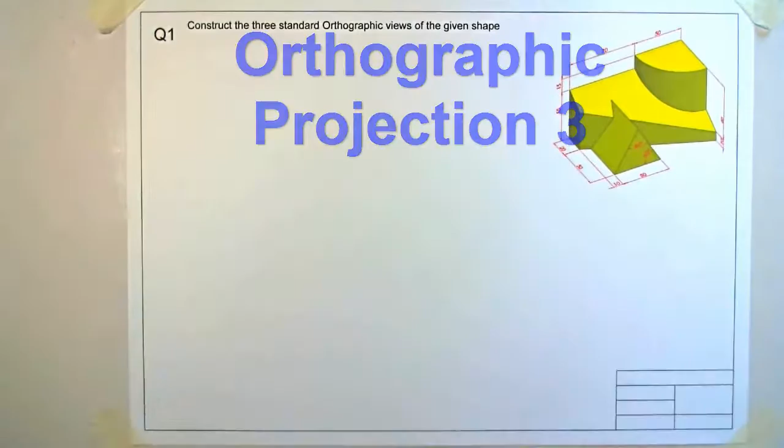So with this drawing it's a bit different because it has both curved and sloping surfaces. But again, we start with our XY line.

We'll start off with our front elevation from this view. Draw in a box that can contain the shape.

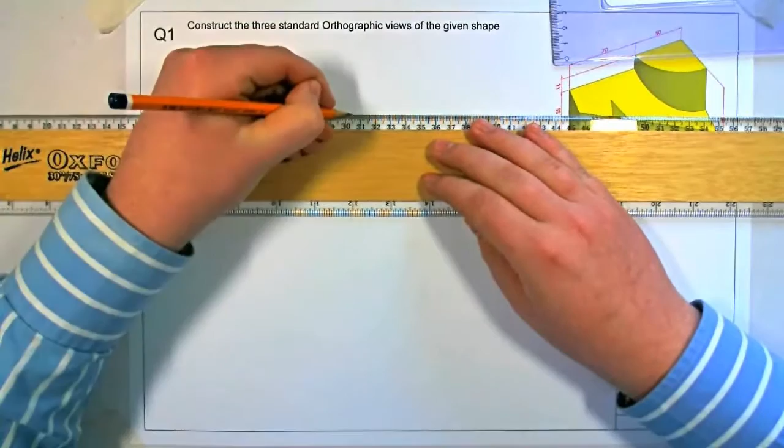Then measure the height and project this across. In this, it will not be possible to draw everything in one view.

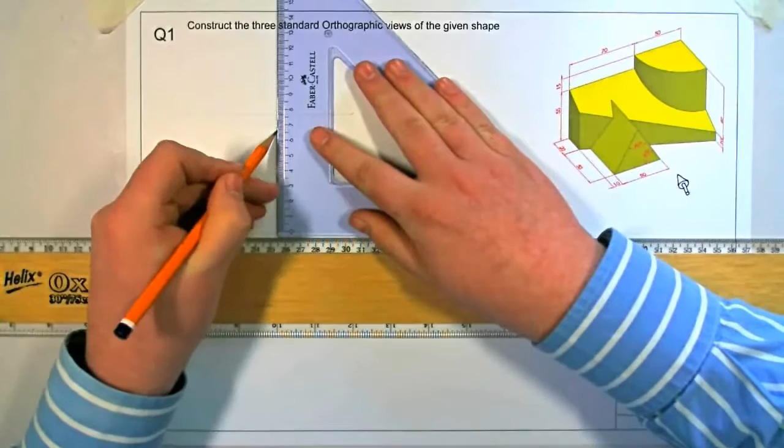For the triangular prism, 60 degrees, so draw up our line 60 degrees and the other on the other side.

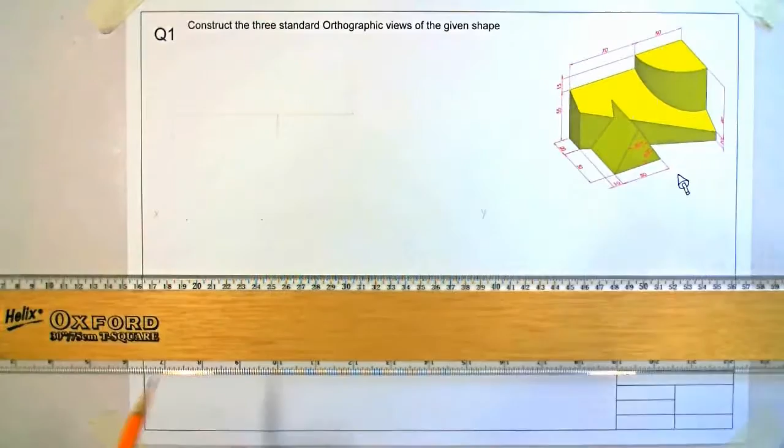Mark in every piece of detail that we can see. So with our ink, this is all that we can draw with the amount of detail that's been given.

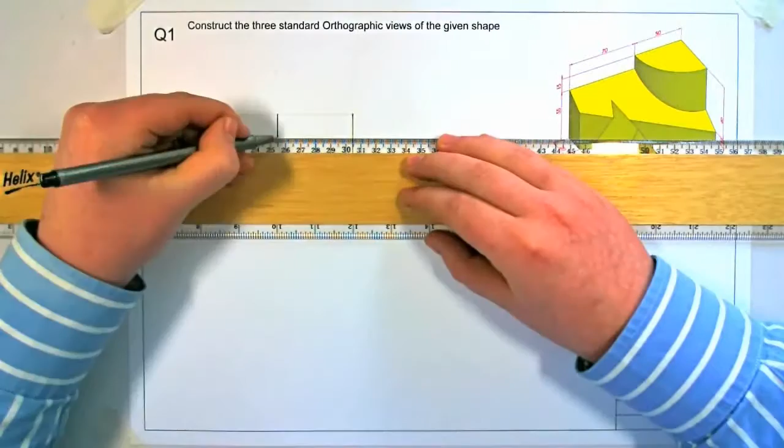We now need to look to our end elevation. So if we draw our end elevation, looking in this view, we should be able to locate some more points.

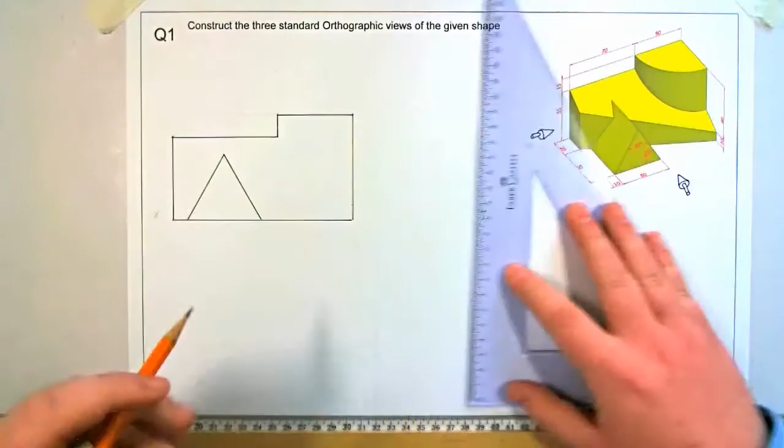Mark in our YY line and label it. Then begin to draw in what we can see in the end elevation. Project across our points that we need.

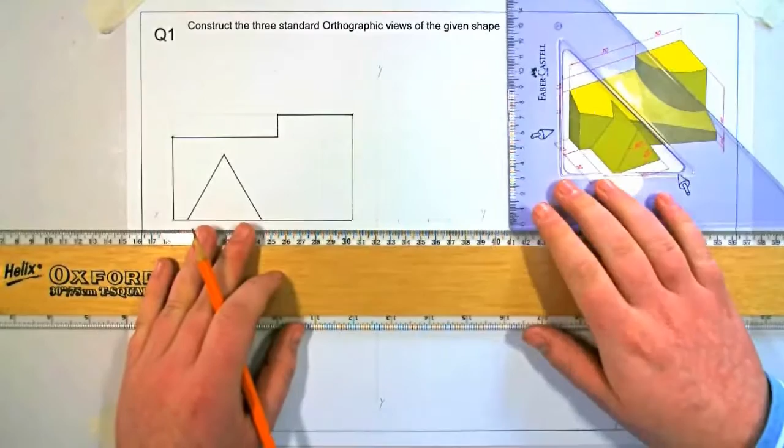Ensure to think carefully and mark in the lines correctly.

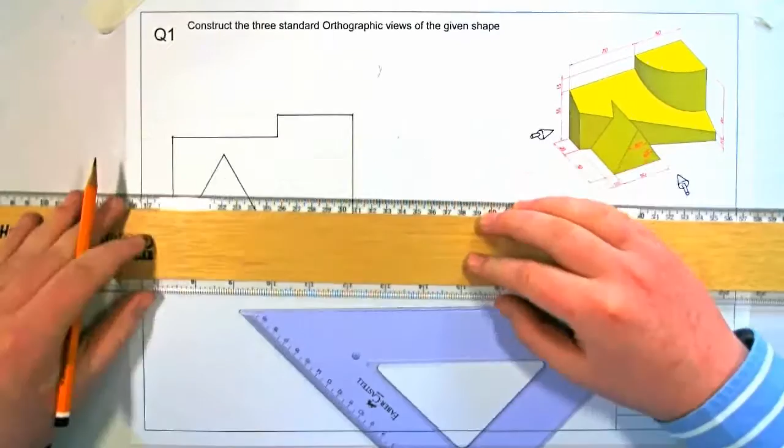So with this detail located, we can project it back to our front elevation.

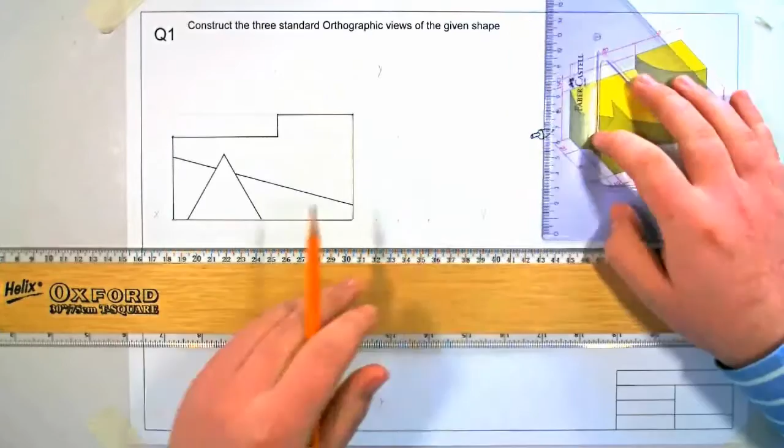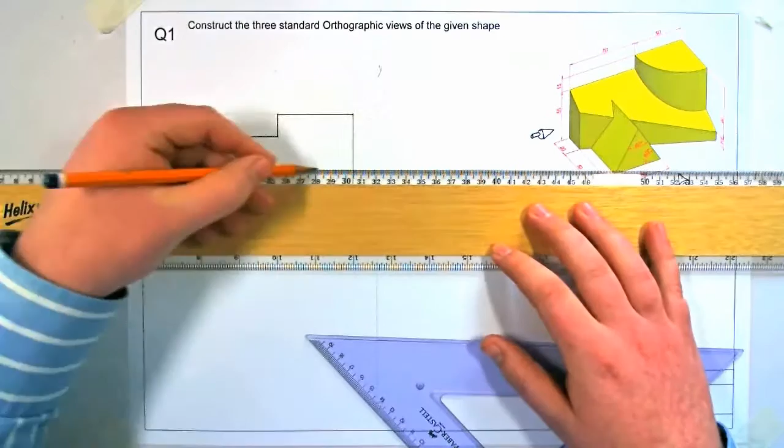Project across any point that cuts. We cannot draw all of it in the end elevation, so we need to look to the plan as well.

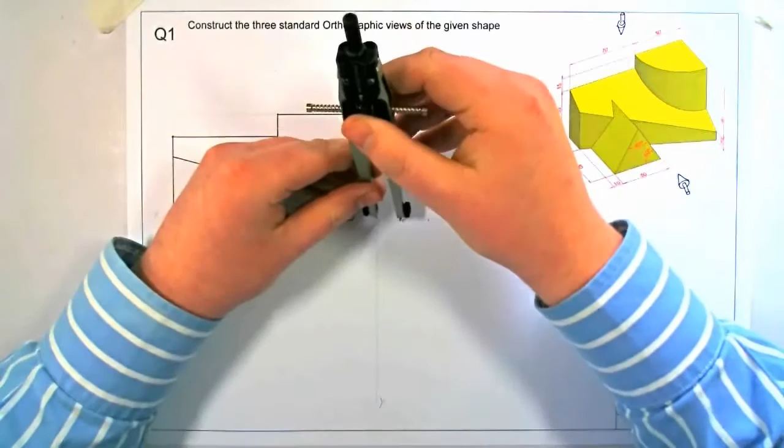So in this, project down our lines to the XY line. Then take a compass, set it at the intersection between the XY and the YY line, and swing around each point as shown.

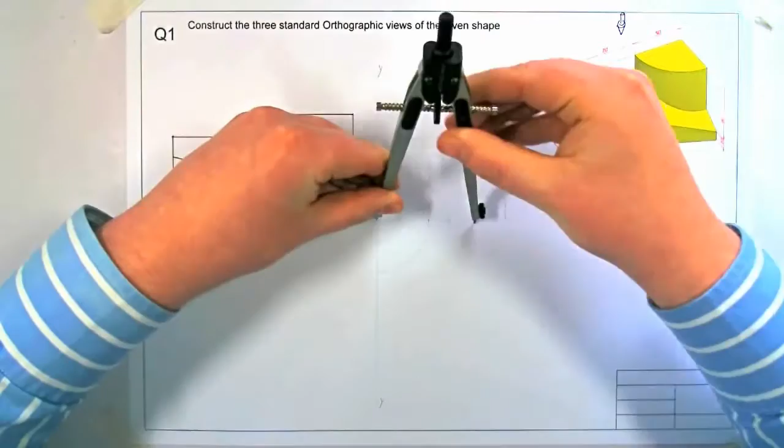Then project them across using the T-square. Also bring down the lines from front elevation.

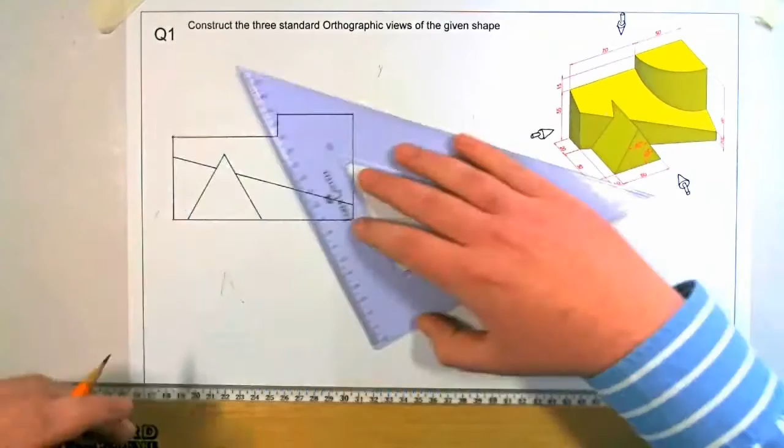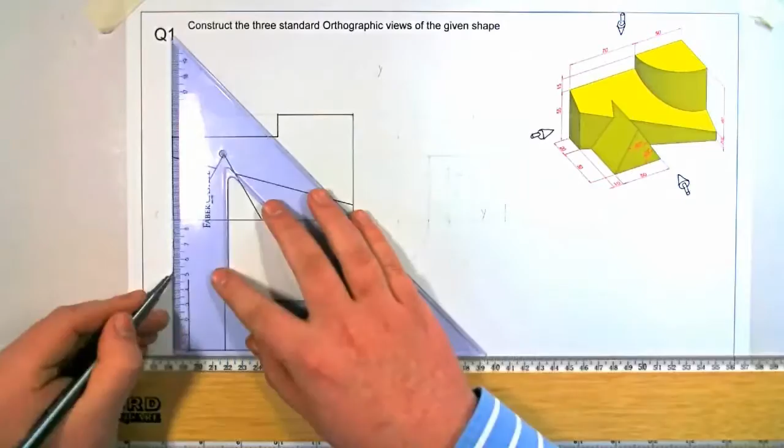Drawing the curved surface. And then ink in what we can see. That is our plan view finished.

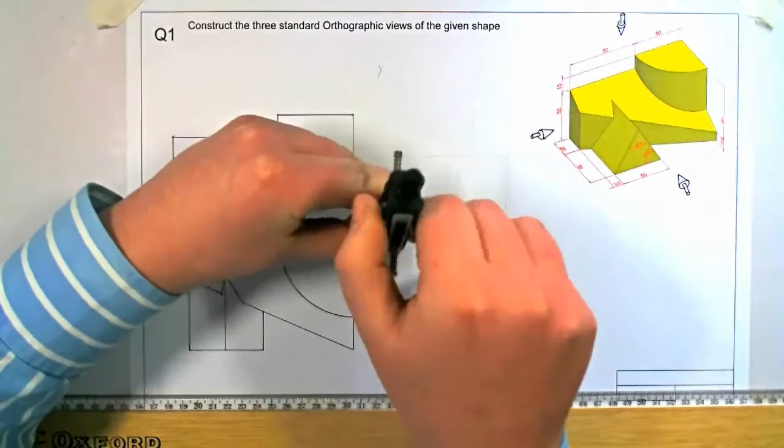So we can now transfer these points back up to our end elevation in order to complete this. Ink in what's finished so there's no confusion.

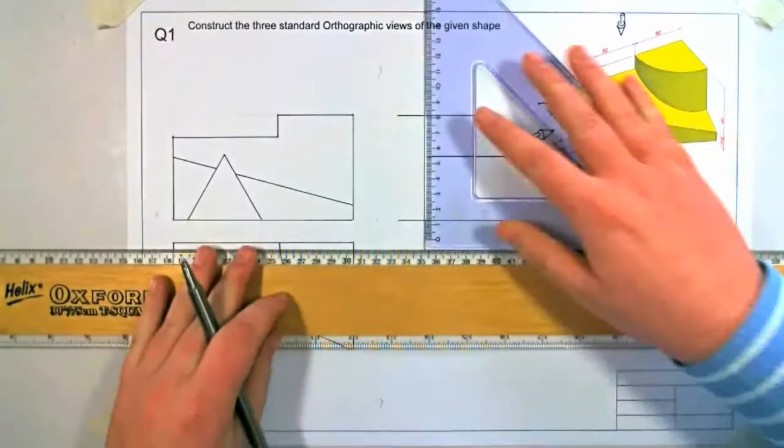And remember hidden detail.

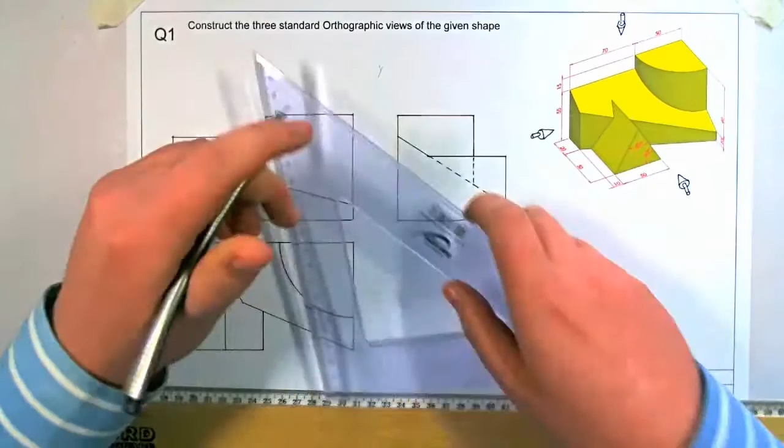So if we follow our points around, we can find where intersections are. You can see this will actually be visible.

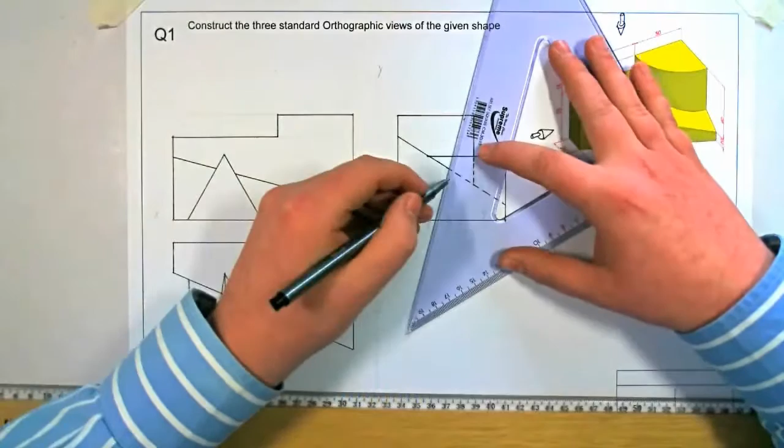Project this back to where it cuts on the ground. And don't forget our straight line. This line is next. We need to find where those two are located.

So with that done, we can draw these in. Remember, these are in hidden detail.

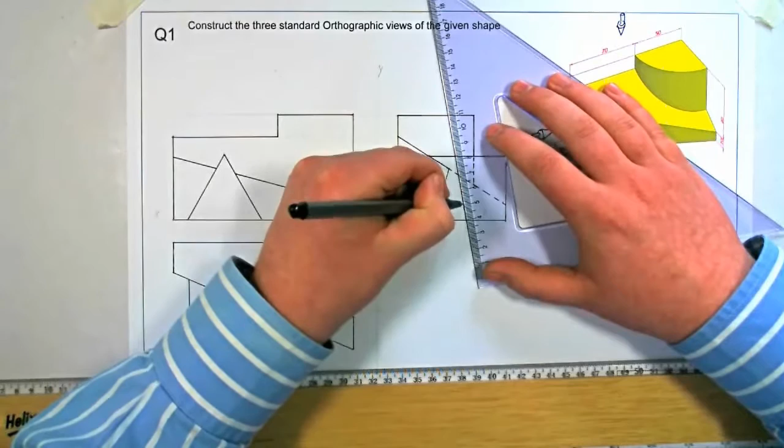Next, we need to locate our curved surface. The way we do this, we divide up the curved surface in plan. Then we project up to front elevation and project our points around.

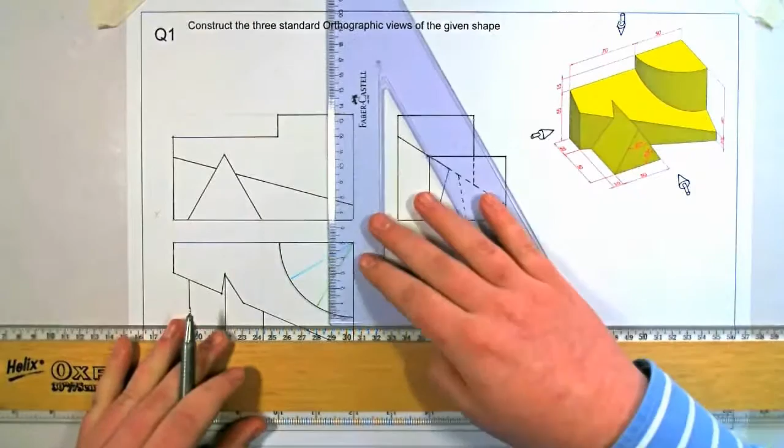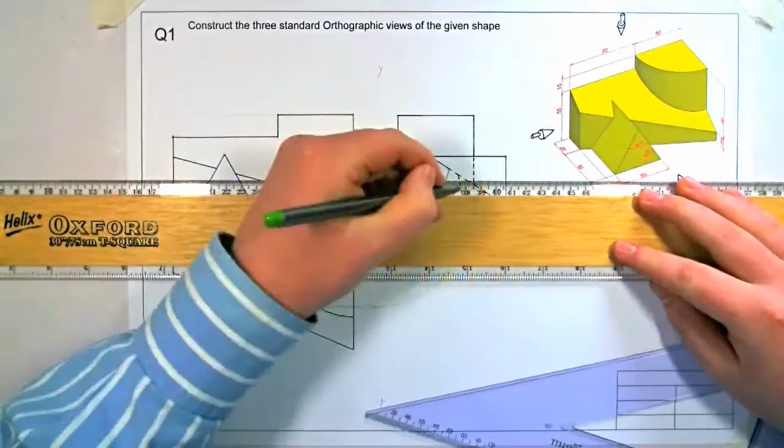So we can locate where it cuts the sloped surface and project it back to our front elevation, and where the two lines intersect is our point. Do this again for the other point.

With these points located, we can then freehand in our curve for our curved surface.